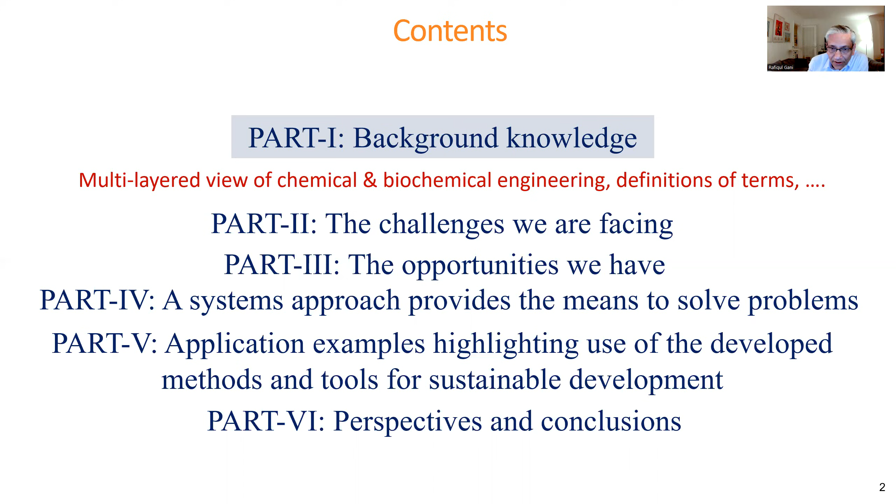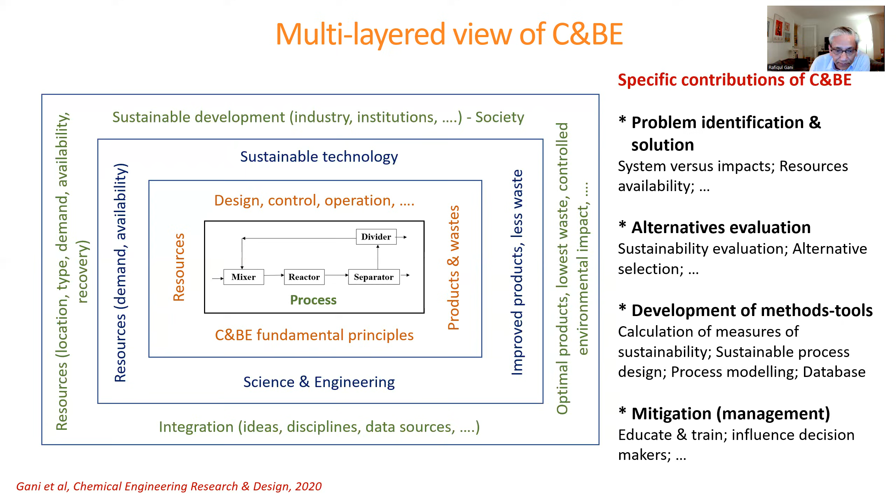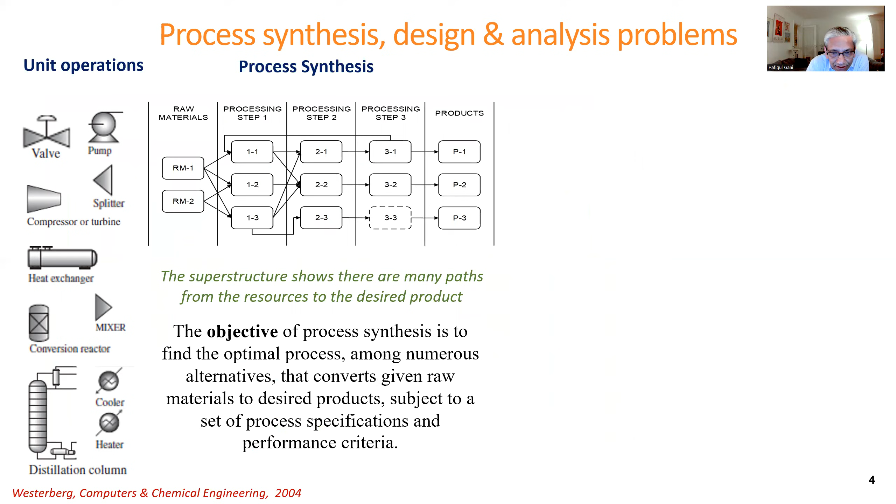Now let's define the synthesis, design, analysis problems. On the left-hand side, you can see a list of unit operations. The objective of process synthesis is to find the sequence of these operations that give us the product that we want from the raw materials that we can use. And what you see is a superstructure of different alternatives, and we want to find the best one. Once we have found the flow sheet, then we need to design the flow sheet in terms of adding more details to the operation, like in a separation column, the number of stages, in a reactor, the temperature, pressure to give the conversion, and so on.

At the same time, once we have the design and the synthesis of the process, we also need to analyze to find out if there are any errors, if there are opportunities for improvement. And based on these, we can set new design targets. And if we can find alternatives that match these design targets, we would have an improved process. So very briefly, these are the synthesis, design, analysis problems.

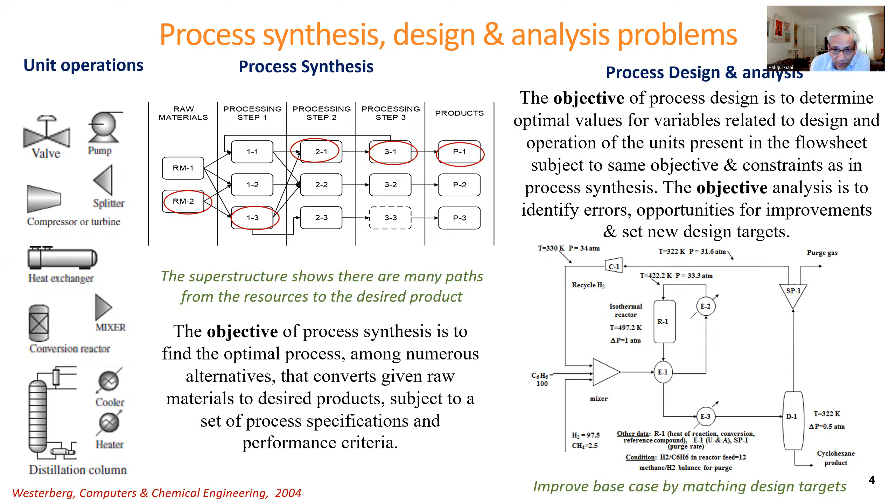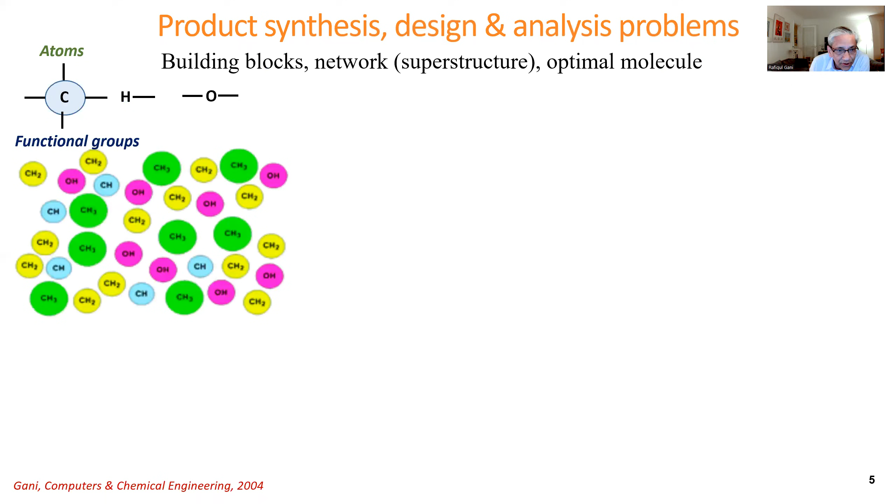The product synthesis, design, analysis problems are also similar. Instead of unit operations, if we think of atoms and bonds and groups of atoms, we combine them to form molecules. Here are examples of molecules, and then we need the properties of these molecules to understand the behavior of the molecule or the product.

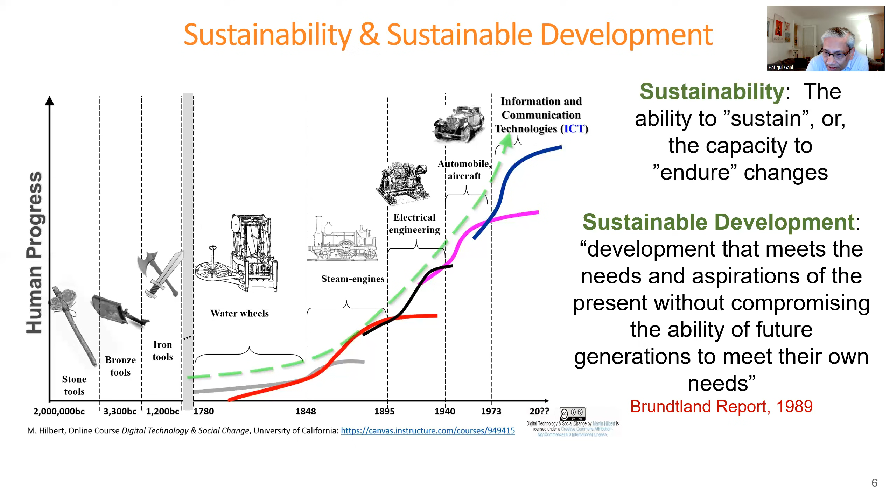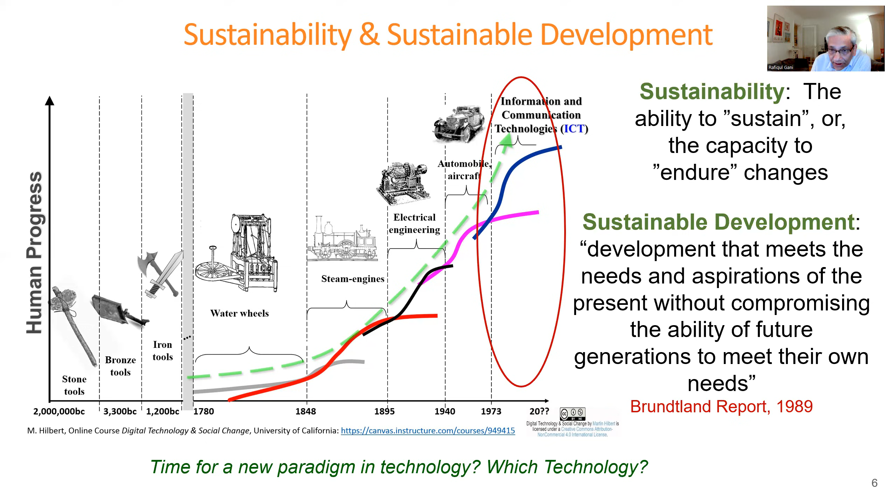What is sustainable development? Again, I like this definition, which says the development that meets the needs and aspirations of the present without compromising the ability of future generations to meet their own needs. The question also is: is it time now for a new change in technology? Or which technology do we need in order to make a new jump and avoid the curve breaking downwards?

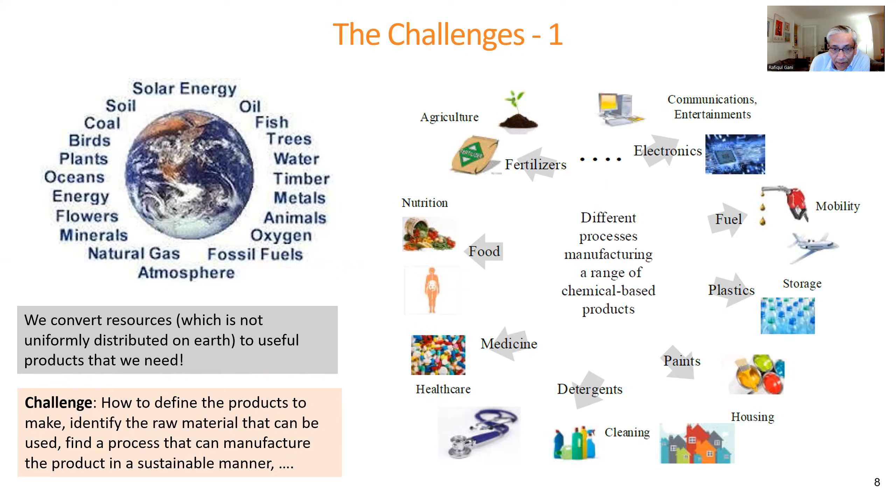So the challenge: how to define the products to make, identify the raw materials that can be used, and find the processes that can manufacture the product in a sustainable manner. Another challenge is that whatever decisions we make on which product to make, which resources to use, which processes to select for conversion of products, etc., have consequences. And these consequences can be represented by the energy, environment, water, food, health nexus, or challenge.

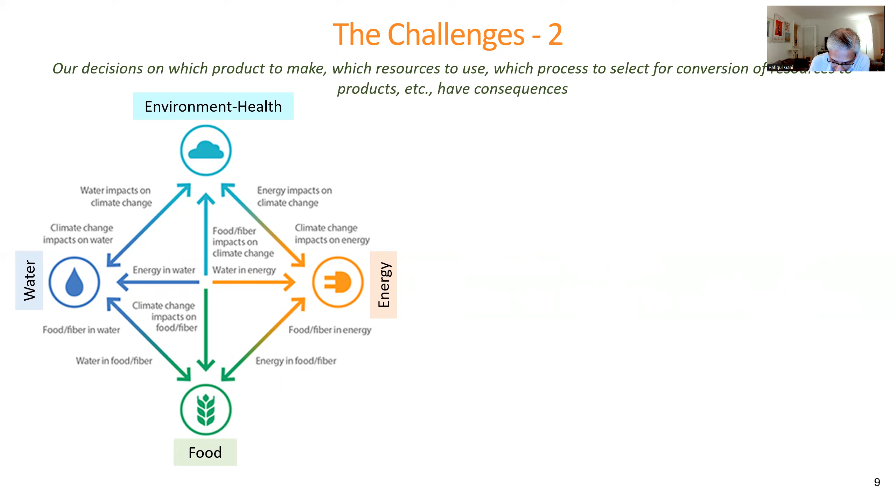They are integrated, and this is even a bigger problem, thinking of a growing population on Earth, which requires an increase in the global GDP, increase in the production capacity of most commodities, which will require more energy, more electricity, more water, and which will increase the release of greenhouse gases. So the challenge: how to address the interactions of energy, water, food, health, etc., for a growing population.

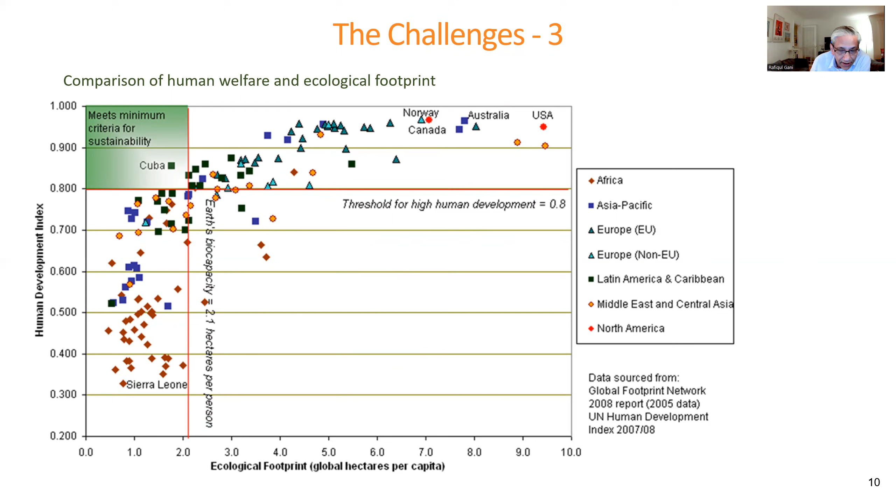The third challenge is a little bit more complex. On the plot, you see the human development on the y-axis and the ecological footprint on the x-axis. The vertical red line indicates the Earth's biocapacity equal to 2.1 that was reported in 2008 from data from 2005. And this is related to the following numbers.

For every country or region, the ecological footprint can be calculated and the biocapacity can be calculated. Those that are green have the footprint smaller than the biocapacity. That means their activities are less than the capacity for that region to endure. For the others, it is the opposite. And now, 10 years later, in 2018, the average was calculated to be 1.73. You see that in the vertical dashed line. So in 10 years, we moved from 2.1 to 1.73.

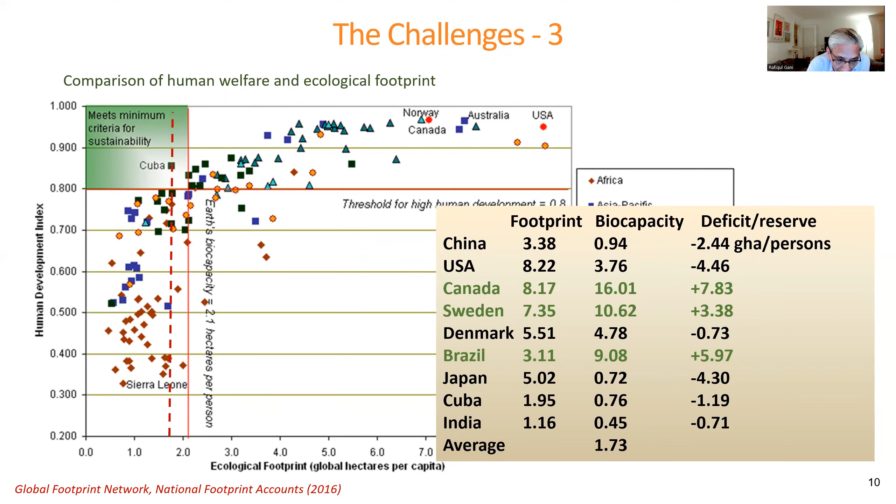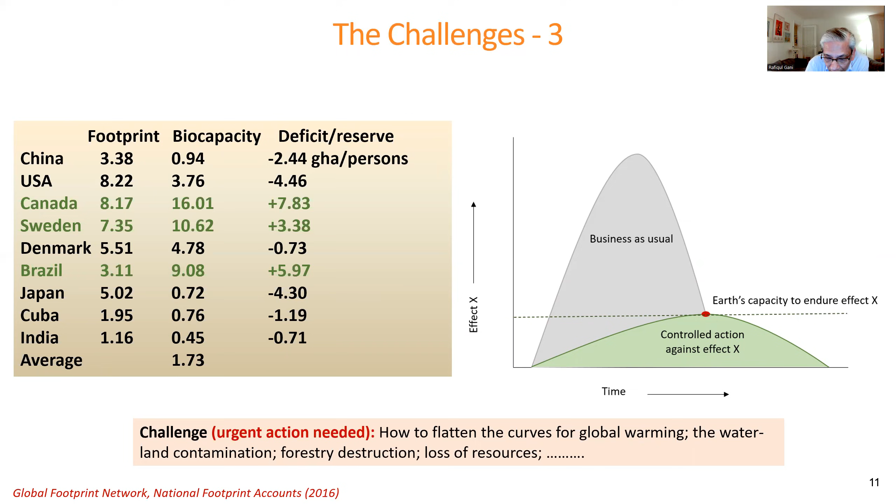Who knows what will happen if we go to 0? So the third challenge is how to avoid going to 0 by flattening the curve, which is in gray, to reach the curve which is green. This kind of analogy is very common now with respect to the COVID-19 pandemic. We need to flatten the curve to reduce the effect of COVID-19. It's the same. We need to flatten the curve for global warming, for water, land contamination, forest destruction, loss of resources, and so on. That's the third challenge.

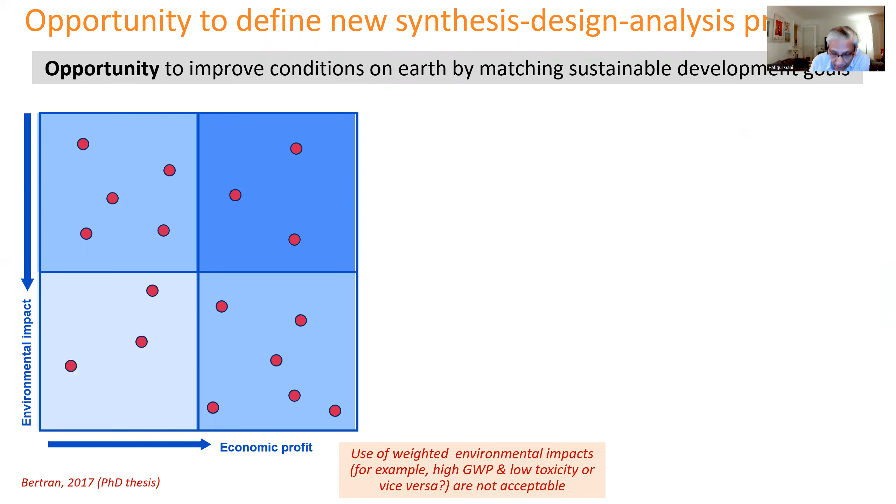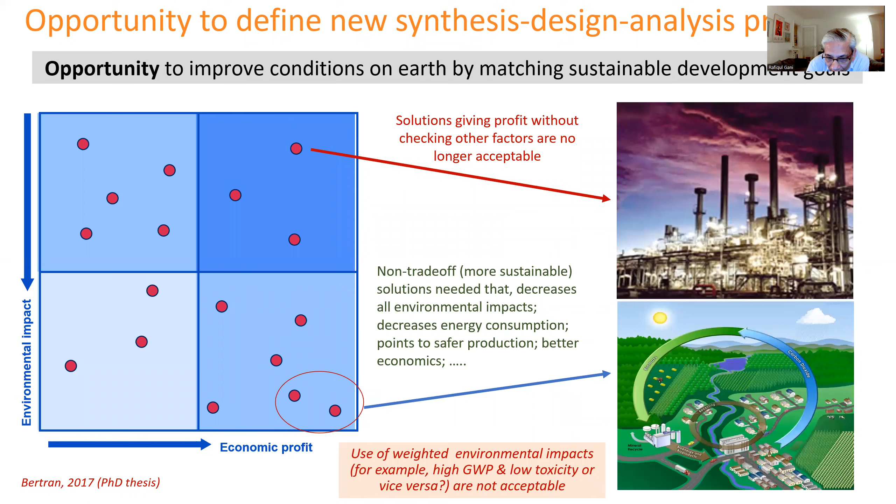The plot on the left-hand side shows the environmental impact on the y-axis and the economic profit on the x-axis. We certainly do not want this kind of situation, which will give us more profit and bigger environmental impact. What we want is this, where we get economic profit, but very low environmental impact. But this requires a new definition of the problem. We want non-trade-off solutions that decrease all environmental impacts, not just a weighted sum, separately all of them, decrease the energy consumption, point to safer production, better economics, and all of these.

Also a question: are we actually targeting to achieve these goals in our different projects? Many of the published papers I see on sustainability do not actually refer to any of the goals that they have satisfied. So it's something to worry about.

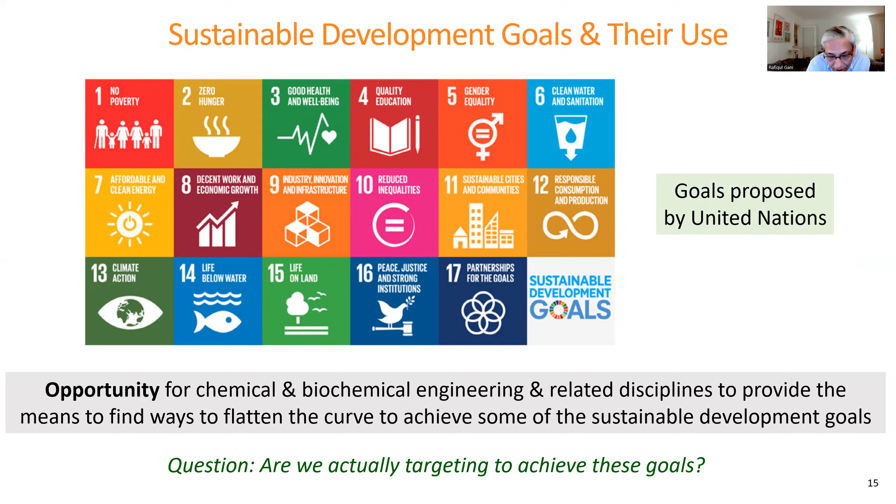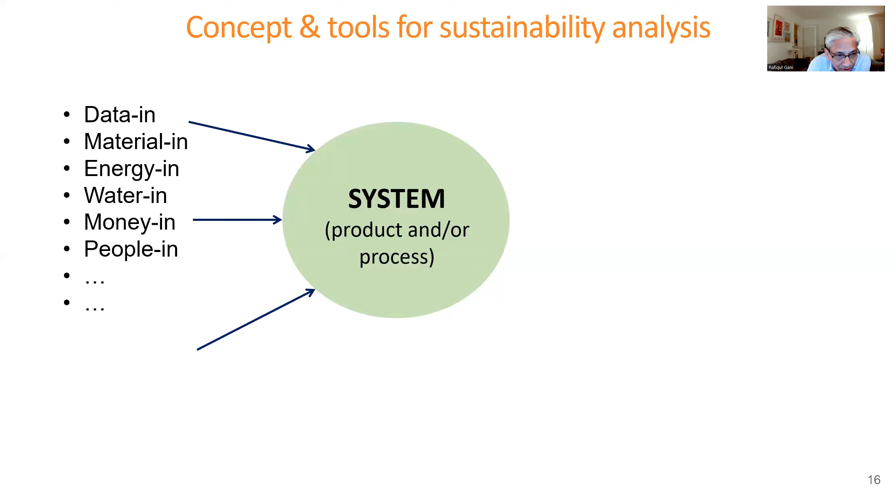How do we measure the sustainability? We need to do the sustainability analysis. Here is a simple concept and the associated tools. We define the system in terms of our product, process, or both of them. Whatever comes into the system in the form of data, material, resources, money, people, whatever comes in, whatever goes out in terms of final results, as well as waste that is released and affecting the environment, and the waste that is recovered and reused.

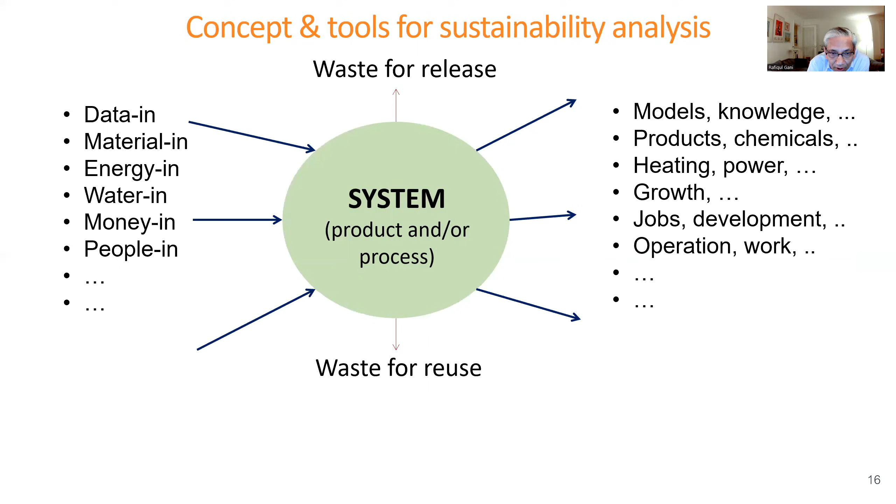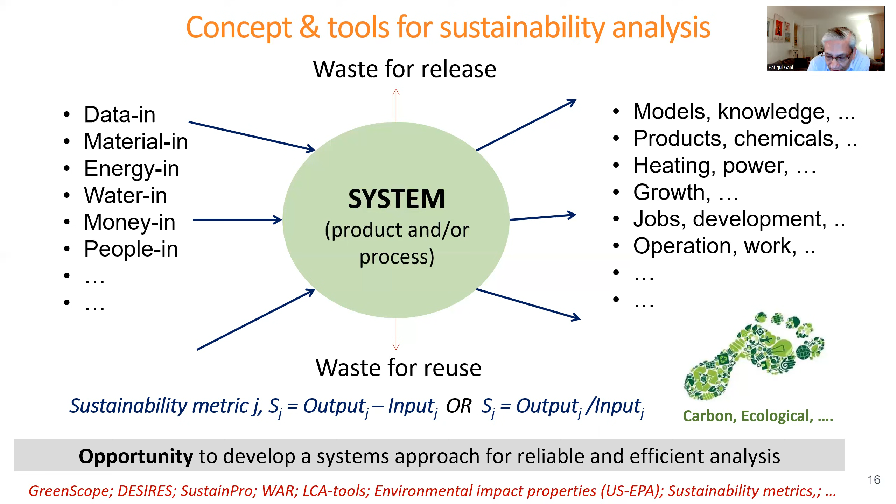If we have all this information, there can be many ways to collect them, but whichever way we collect them, if they are consistent and correct, we can then calculate the sustainability metrics, which are usually related to output and input, either the difference or the ratio. And the same information can also be used for models to calculate the carbon footprint, ecological footprint, and hydrogen footprint, and so on. There are tools that are already available, but the opportunity is to develop a systems approach for reliable and efficient calculation of these measures.

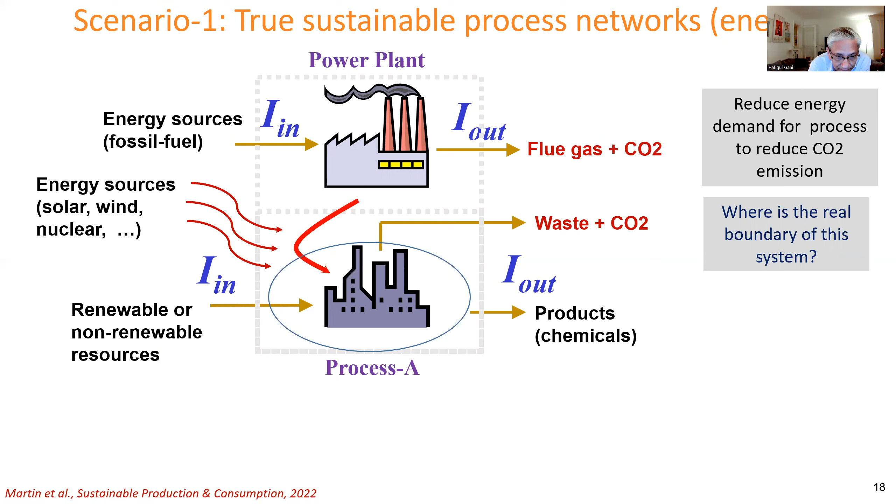But the process also needs, for example, energy, and that is provided by, for example, a power plant that converts energy resources, and depending on which resources they use, they will also generate CO2. So the process, as well as the power plant supplying the energy for the process, together will generate waste and CO2. There can be other ways to get the power from other energy sources that will not release CO2. So there are energy demanding technologies like process A and energy producing technologies like the power plants. And they use different resources, some that generate CO2, others that do not.

We need to combine those two in such a way that we will have zero or negative CO2. So the opportunity to combine these technologies to determine new innovative solutions that are significantly better is possible.

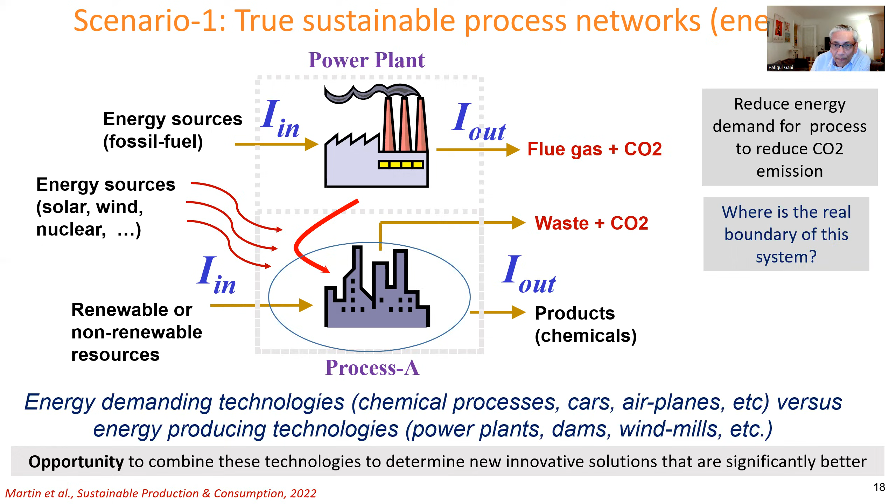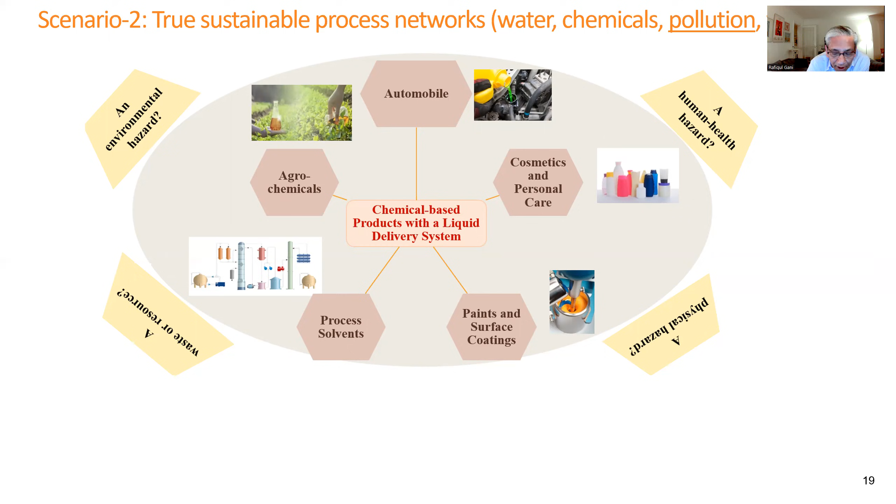Scenario 2 deals mainly with pollution, where energy is not the important issue, but pollution in different forms and waste in different forms are important. And if we consider that nearly 95% of all manufactured goods rely on some form of industrial chemical processes, out of which nearly 500,000 chemical substances have been registered, and an estimated 40 to 60,000 industrial chemicals are found in commerce globally. And take into account that the measured data can be found for around 20,000 chemicals only.

So what about the other remaining chemicals that we are using? What effect do they have? So the opportunity is to develop a system for prevention instead of curing the problem.

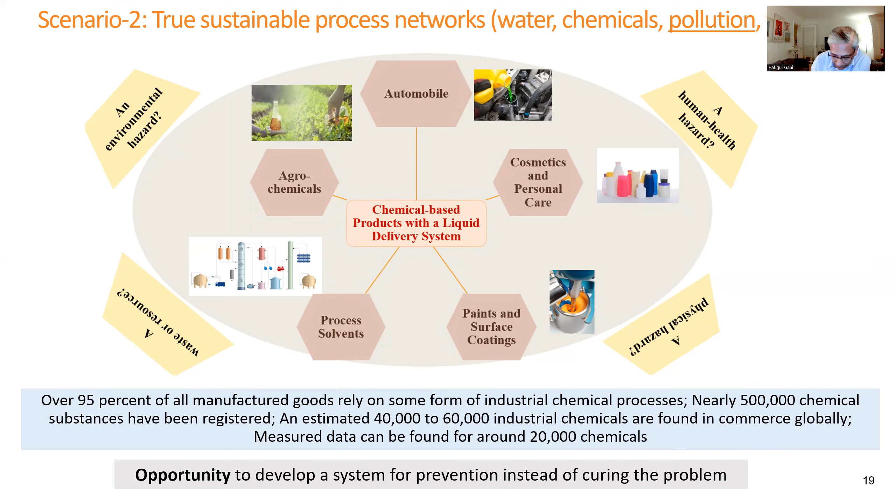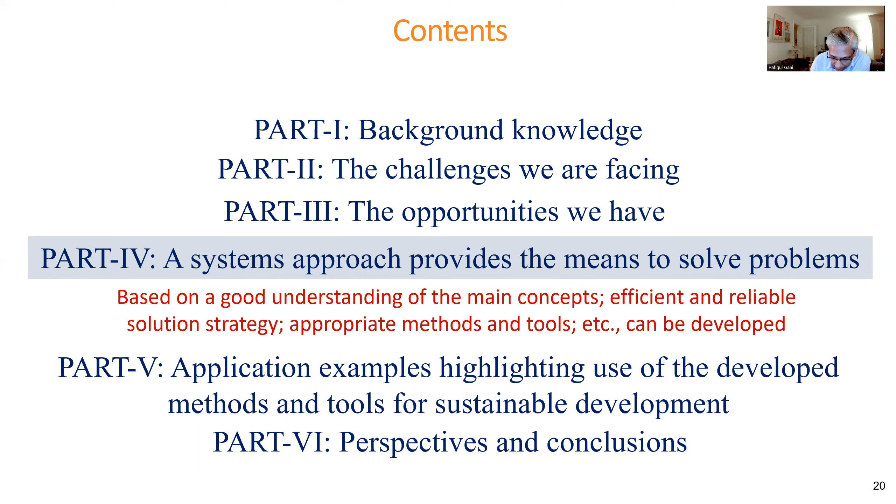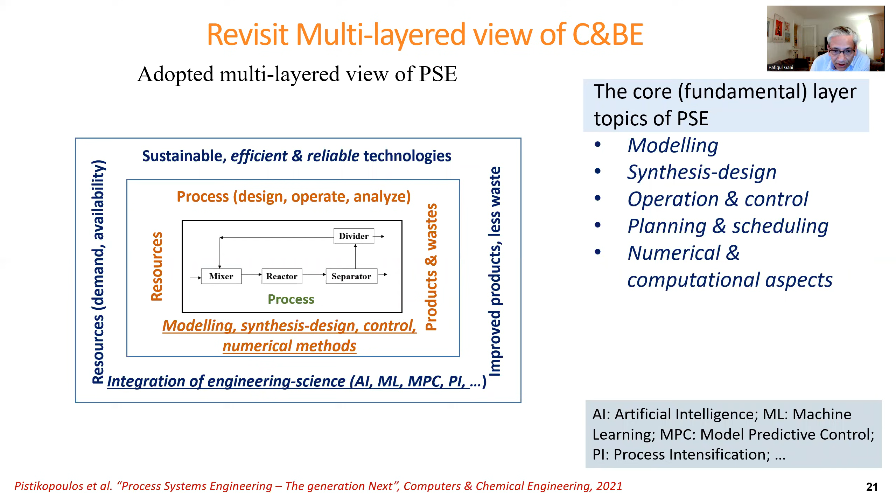Now the core topics are modeling, synthesis design, operation control, planning and scheduling, numerical and computational aspects. These are the fundamental topics of process systems engineering that can help us to design, operate, analyze chemical and biochemical processes, in addition to the fundamental chemical and biochemical engineering topics of thermodynamics, reaction engineering, etc. And again, we need to augment the fundamental topics with the topics from the middle and outer layers so that we can achieve the final goals. So develop methods to combine the core topics with those of middle and outer layers to meet the current and future challenges.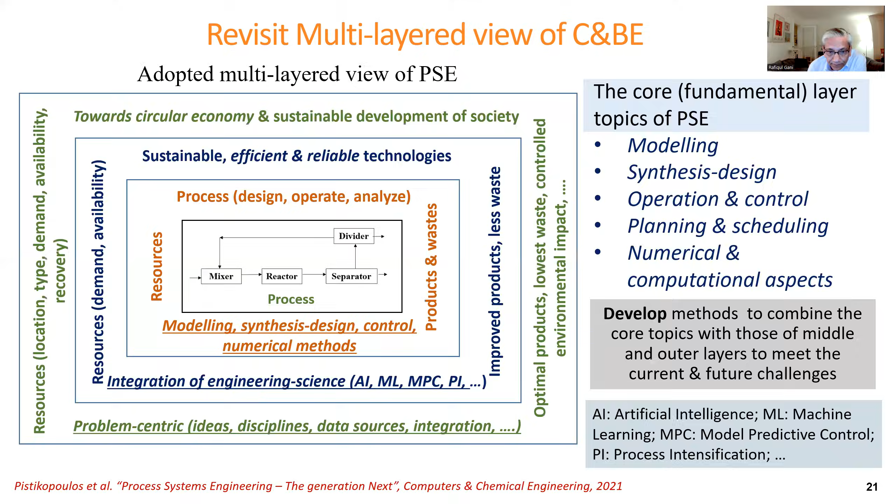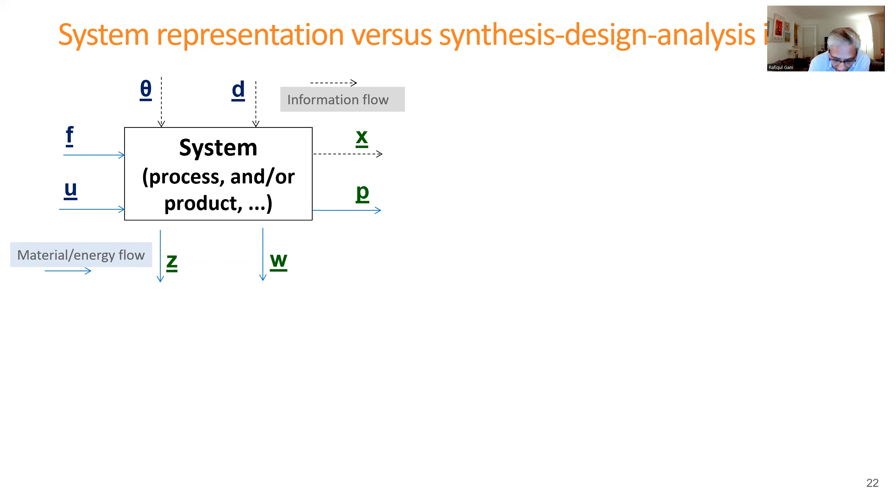And this can be done at different scales by combining the models at different scales, starting from the lowest microscopic scale or phenomena to the largest mega scale, like enterprise. All of these can be handled through combination of different systems and models. And what kind of questions do we want to answer? Which material to use and how much to use, which product to make and how much to make. So there are decision variables as well as real variables. Which utilities, how many processing steps, and so on. So all of these questions we want to answer, and if we answer them correctly, we will end up with a sustainable process design.

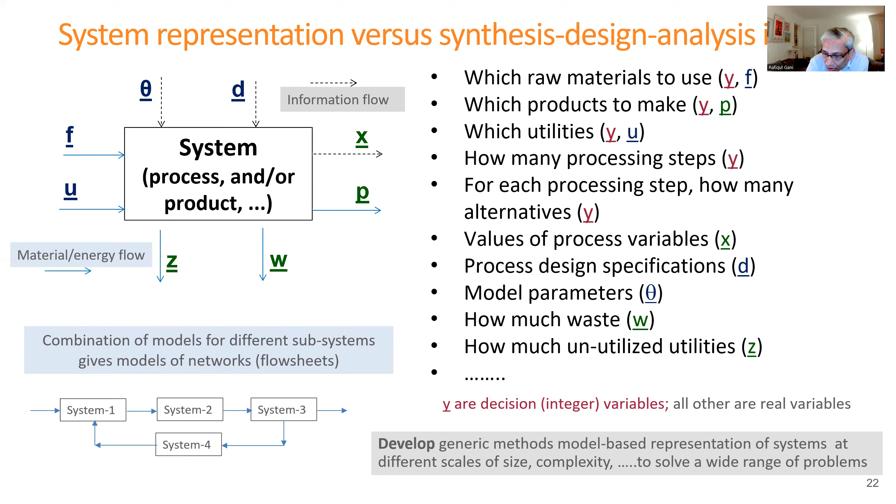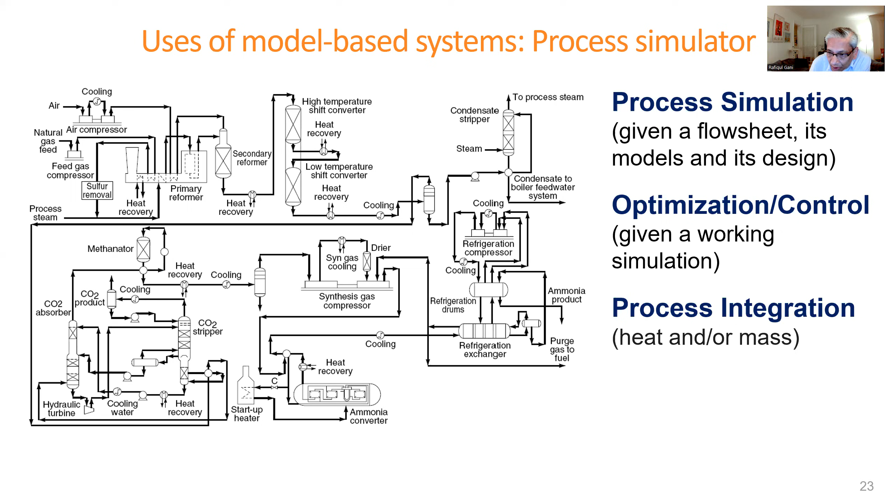Ammonia is a very important product now because in addition to fertilizer manufacturing, it also can be used as hydrogen storage for the hydrogen economy. So if we have the model through a process simulator, we can do process simulation, optimization, control, process integration, analysis, and these problems are routinely solved, provided the needed information is available. You can think that at any time on Earth, somebody somewhere is using a process simulator to solve this problem. So it's very common.

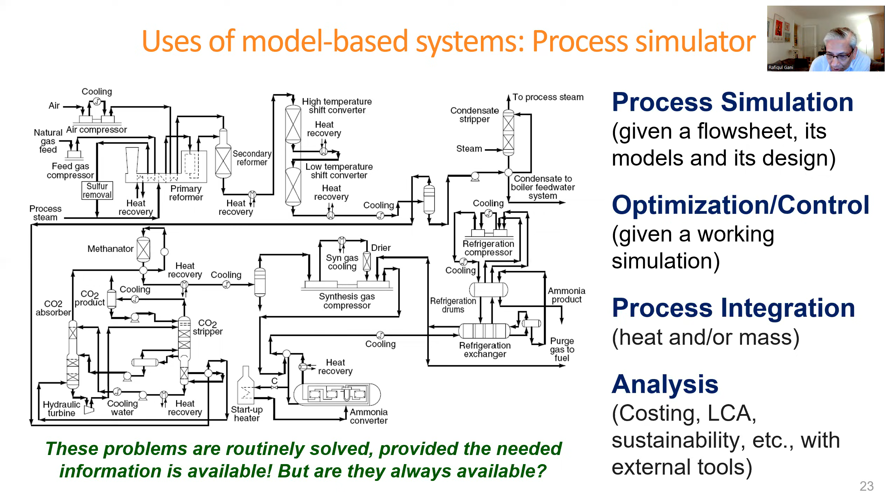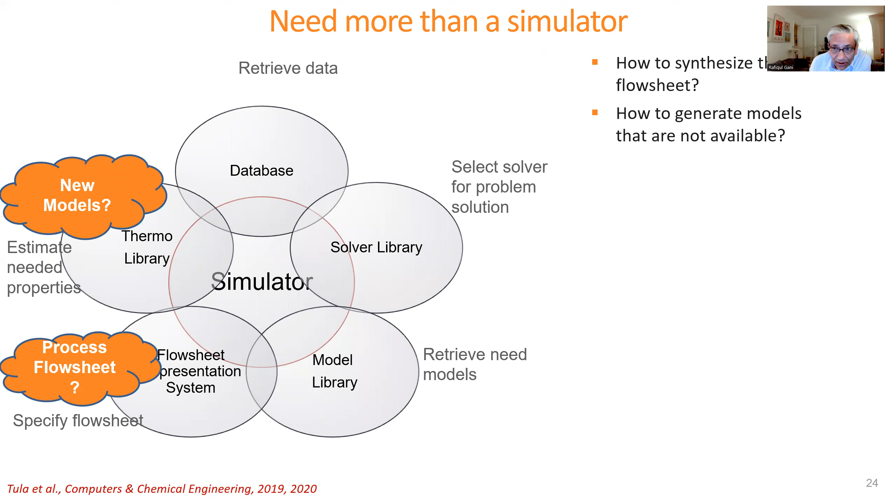But the question is, is all the information that is needed always available? Let us look at a process simulator and the main parts of a process simulator. These are all available. But what happens if a process simulation flowsheet is not available? Or what happens if some model that we need is not available? Or there's a new unit operation? Or we need new solvents or catalysts or new compounds? Can the simulator work? Obviously, the simulator does not do these things. So we need a new class of simulators or software components.

But we are still solving these problems. How do we solve them? Basically, we are doing a trial and error approach. We guess these things. Then we do the simulation. If they match our requirements, it's fine. If they don't match, we do it again. The trial and error approach can give us the solution we need. We can be lucky if we get it faster. But do we really get the order of magnitude improvement and new and novel solutions? In my view, no. So we need to develop a new class of component-based software tools associated with problem-specific workflows and data flows that can tackle a wide range of problems of interest.

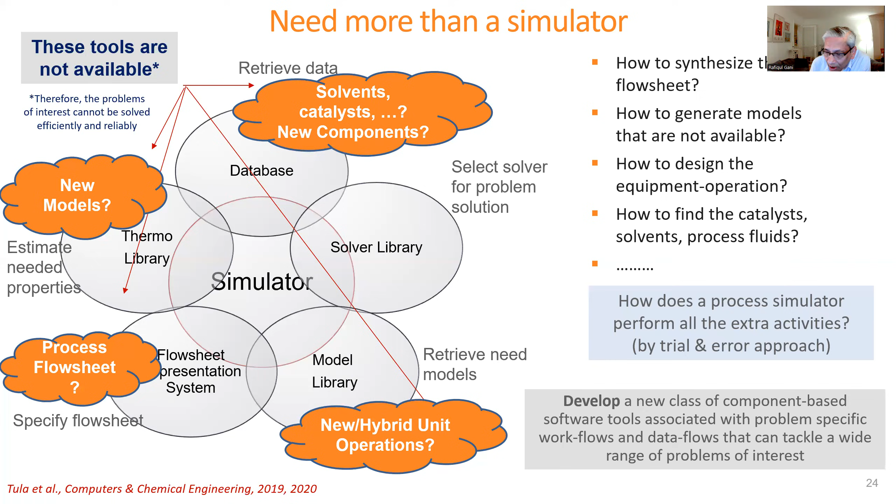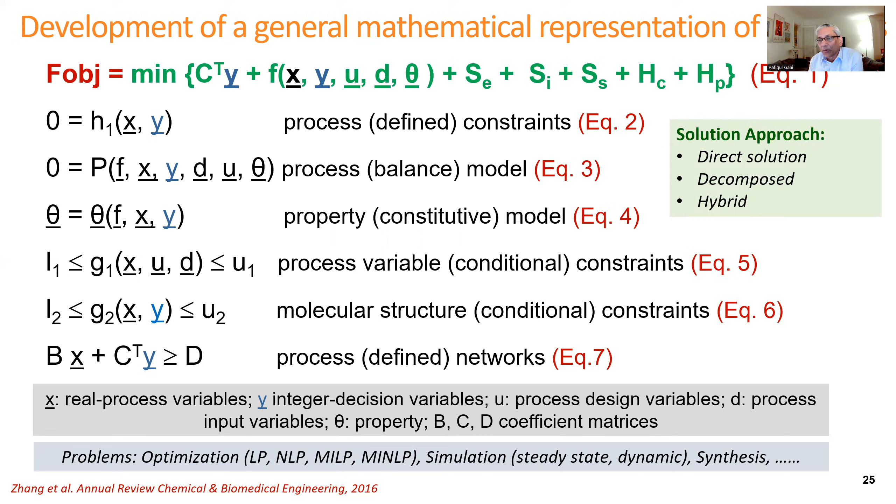Depending on the equations, we can solve all the equations simultaneously. That would be the direct solution. We can solve them in a decomposed manner. That would be the decomposition-based solution, or we can do a hybrid, a combination of both. Which one to use depends on how many equations we have and what the complexity is. It can be as simple as 7 linear equations, or as complex as 1 million highly nonlinear equations. So the model and the problem will define the solution strategy.

Here are some examples. Equations 4 and 6 typically represent a product design problem. Equations 2, 3, 5, 7, a process design problem. Equation 1 is the objective function if we want an optimal product or process. And any equations from process going to product or product going to process means an integrated product-process design problem. If we solve only equation 3 or equations 1 to 3, we need a process simulator that also does optimization. But if we want to solve equations 4, 6 or 1, 4, 6, we need something similar to a process simulator that we can call the product simulator.

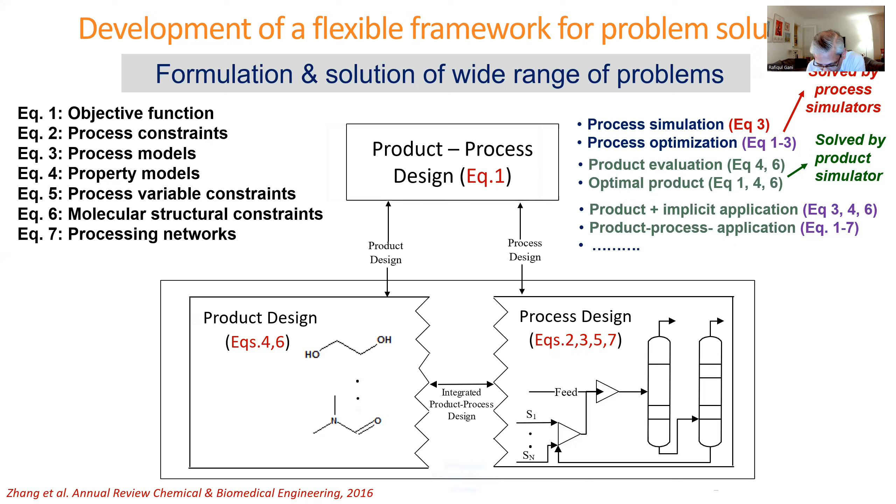Or we can solve integrated product-process problems, the simpler one, 3, 4, 6, or the most complex one, from 1 to 7, and many more. So these are the types of problems we want to solve, the corresponding solution options that we need to have, and the solvers we need for them. So let's look at the decomposition-based solution strategy.

We have 3 stages. We decompose the problem into 3 stages: the synthesis stage, the design stage, and the innovation stage. And this can be done through the 12 steps that are given in the workflow for sustainable process design. And in order to achieve this workflow, the different tools we need, the algorithms we need, the data we need are shown on the right.

I'm not going to go through all of these now, but I will just point out one of the tools, which is this one. The other tool, ProCAFD, is called computer-aided flowsheet design, which does all those other things. And I can point out where the use of the simulator is, as we know, only with respect to simulation of the process, the rigorous simulation of the process on the top right-hand corner. Other than that, we need a lot of other tools that, unfortunately, the process simulator does not provide.

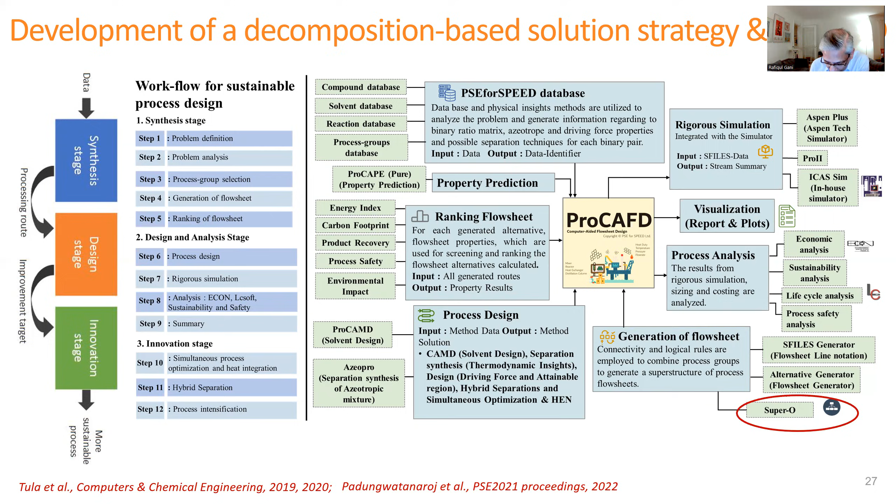So what is Super-O? Super-O is a synthesis tool that can do process synthesis as well as innovation, and it can be applied for both. So we define the problem in terms of what we want to convert and what we want to achieve. Based on that, we create a superstructure. Super-O helps to generate the superstructure. Once the superstructure is generated, Super-O converts this through the generalized model and represents the entire superstructure with the model.

Then we do a model analysis to find out which variables and parameters need to be specified in order to solve the problem. We have a database that can help us to provide the variables for the known variables and parameters. Otherwise, we need to collect them and regress them. And once the model is ready to be solved, then we connect it to external solvers, and Super-O does this connection automatically, and it calls the numerical solver and then gives the solution.

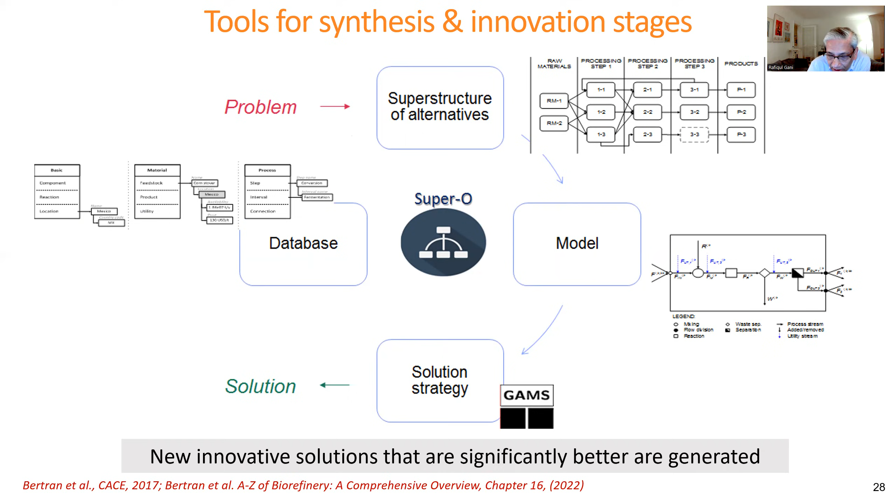And then once the solution is obtained, we have a process flow sheet, which we can then connect to a simulator and do the simulation and optimization for the specific result that we have found. This gives us options for new innovative solutions that are significantly better and that can be generated. The final aspect of the tools and systematic method is representation of the result for comparison purposes.

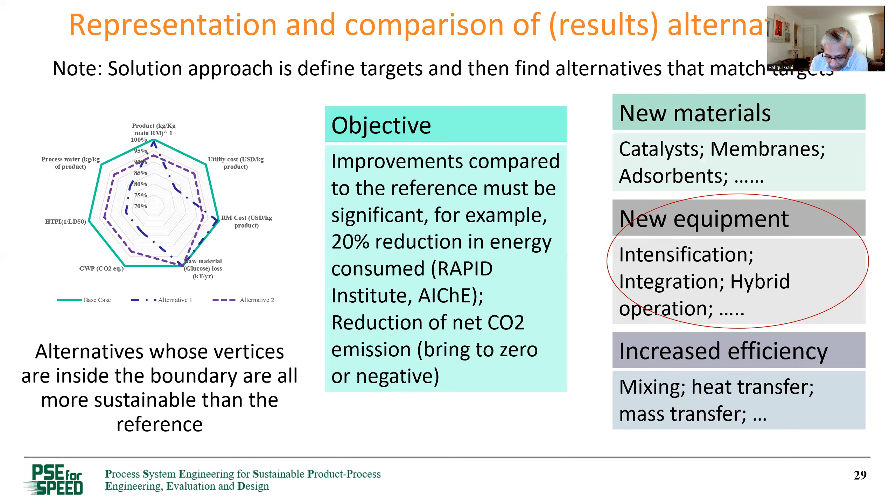Sustainability, in my view, is not an absolute measure, it's a relative measure. So what we need is curves like the spider curve or the radar plot. We have the green, which is the boundary, and what we want are solutions that are inside the boundary, and at least 2 of the vertices should be better than the boundary, and none of the vertices should go outside the boundary. If we achieve this, then we achieve the objective of generation of sustainable alternatives, and we can find them through new materials, through new equipment, through increased efficiency. With this background, let us look at some of the examples.

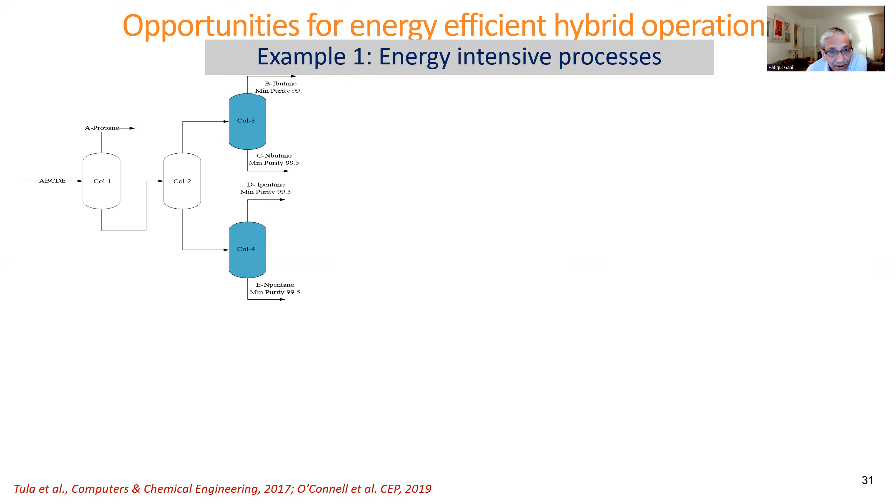The first one I will show is what we can do to reduce the energy demand. But energy demand is not enough. We also need to see, are those processes energy intensive? That means how much energy do they use? And compared to biochemical processes, petrochemical processes use more energy, and also the volume of the chemicals handled is much higher. This specific example is a depropanizer, debutanizer, and the 2 shaded columns use a lot of energy. And they use distillation columns. So can we reduce the energy by replacing the distillation column, which is energy intensive?

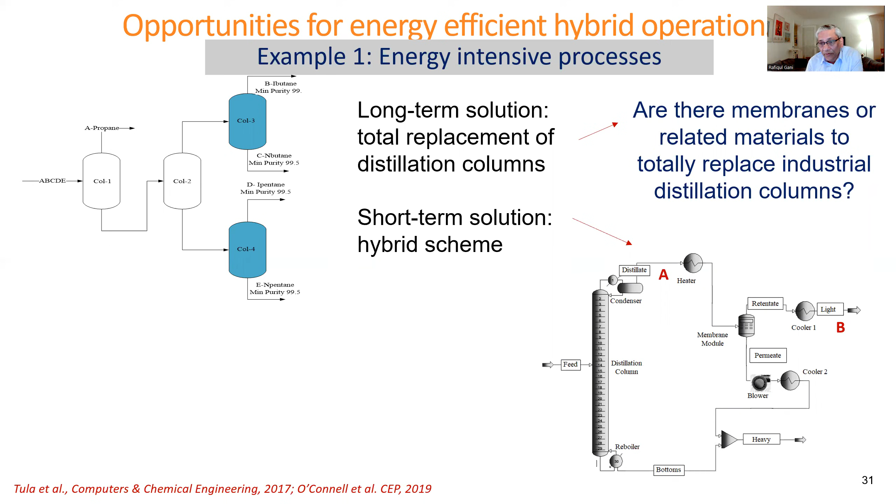So we still reach the 99% requirement of purity, but we combine 2 unit operations that operate at their highest efficiency. Between 10 to 50% of the energy consumed by the single distillation column can be saved. Considering that at least 100,000 distillation columns are operating currently on Earth, there's an opportunity to make a big impact.

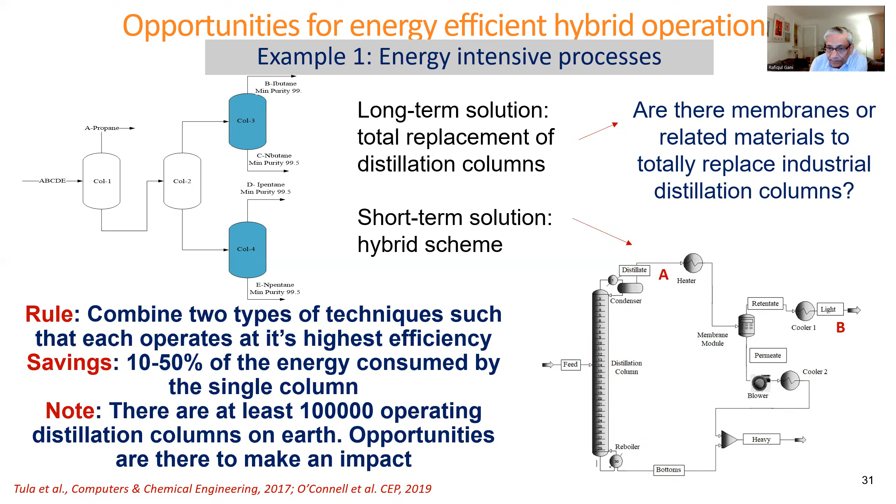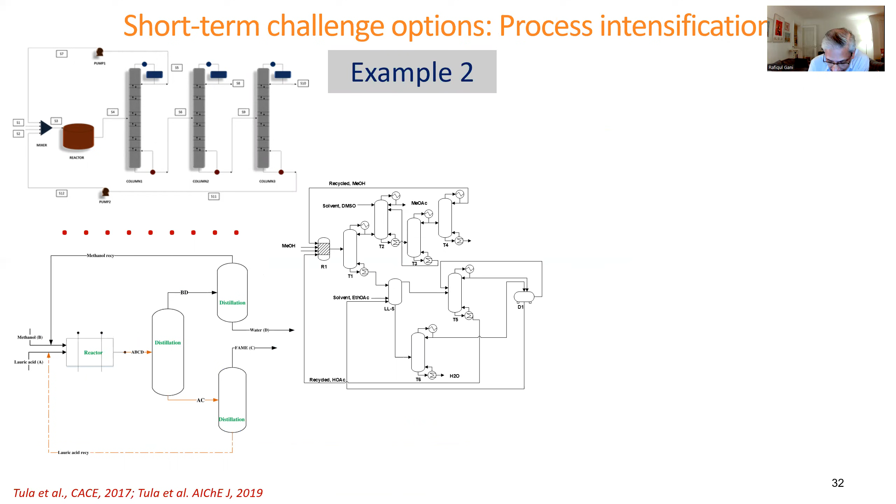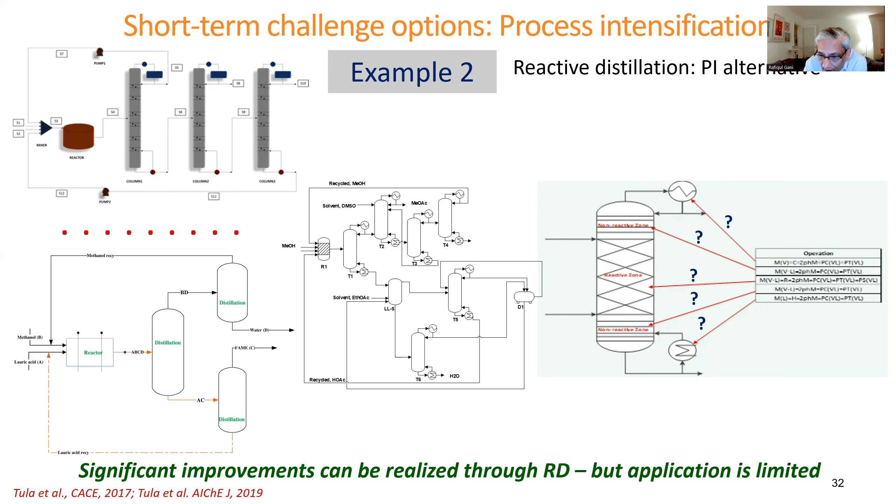Another one is that we have these 3 processes. All of them use a reactor followed by separation. The bottom left-hand corner is a biochemical process. So whether it's a biochemical or chemical process, if the flow sheet is like this, reactor followed by separation, they can be converted into one intensified reactive distillation. The questions relate to the condenser and reboiler duty, as well as the number of stages in the reactive and non-reactive sections. But how do we know that for a chemical or biochemical process, a reactive distillation can be used and the required improvements can be achieved?

If the answers that you see to the questions on the column below the reactive distillation are all yes, then definitely a process can be converted into a reactive distillation. If, for the separation part of a process, the 7 questions are yes, then at least 2 columns can be converted into a divided wall column for the same benefit, at least 20% improvement.

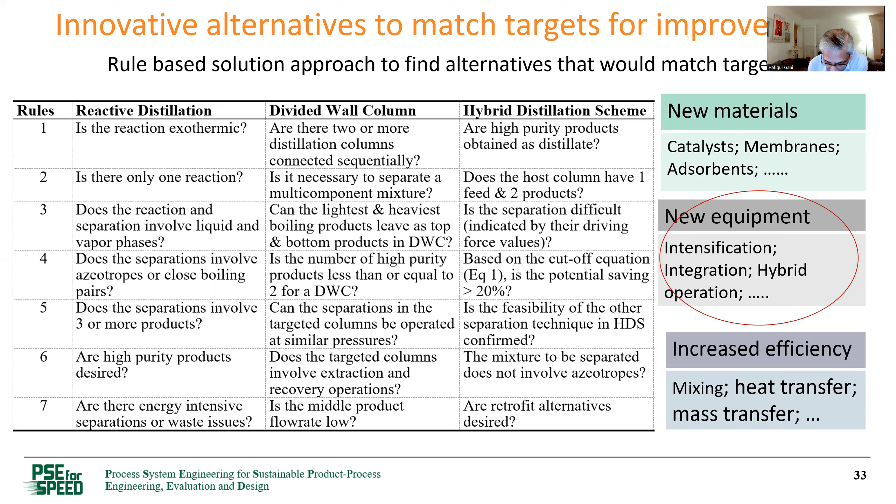If a distillation column is operating and the answers are yes to the 7 questions, a hybrid distillation can be found with between 10 to 50% improvement, usually 20% improvement. So all of these are possible. And methods and tools are already available.

Let's look at the synthesis design problem for a biochemical process, and it's multi-product, so it's not a single product biorefinery, but a multi-product biorefinery. We have 3 raw materials: palm seeds, waste cooking oil, microalgae. We have biodiesel, which is P1, glycerol, which is P2, and other products which are P3, P4, P5. So how much product to make, which raw material to use, we want to find out by synthesizing the process and designing the process.

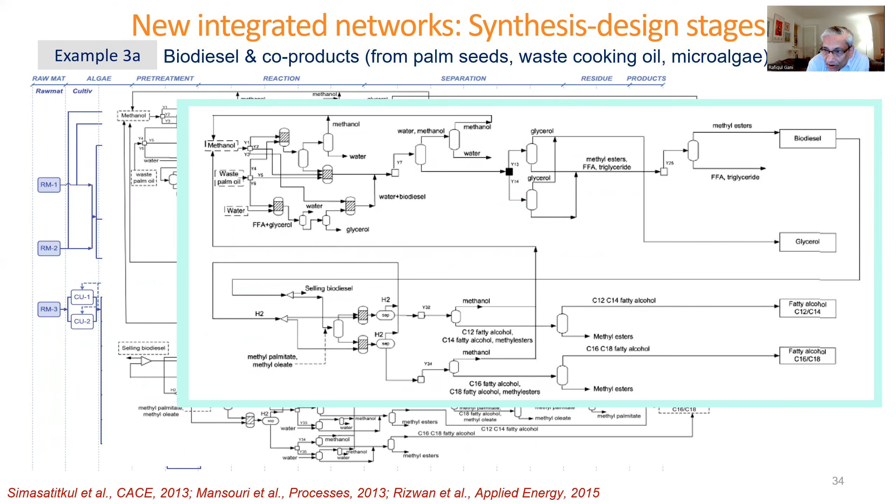So by solving this synthesis problem as a mixed integer nonlinear programming, we find out the detailed flow sheet of the process. And in order not to spend time on this, I simplified the description. So we have the biodiesel, we have glycerol, but we are not taking the biodiesel out from here. We take it out from the green boxes that you see, because we take out part of the biodiesel and part of it we convert to fatty alcohols, which have a higher price than biodiesel.

So when the price of biodiesel is low, we can convert the biodiesel to higher value products. When it is high, or when the demand is high, we do not need to do that. At the same time, we have glycerol, whose demand is not very high, and we need to convert it to something else. And that I will show in another example where we can take this glycerol and do something else with it.

So let's also look at the synthesis problem, because we already talked about how the Earth's resources are not uniformly distributed. So problems like this are also region dependent. So first, we formulate the problem as a simple synthesis problem with 1 product and multiple raw materials, 6 biomass raw materials coming from 7 different countries. And we want to find out which raw material to use from which country to make ethanol with the best profit.

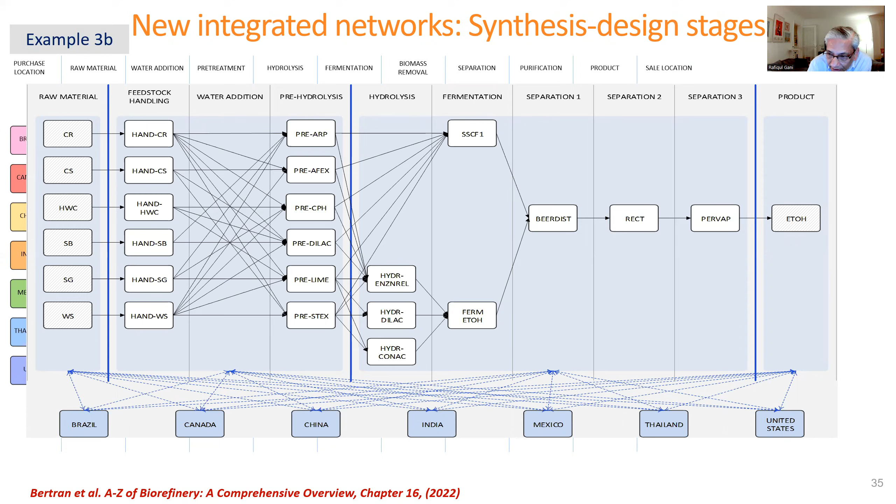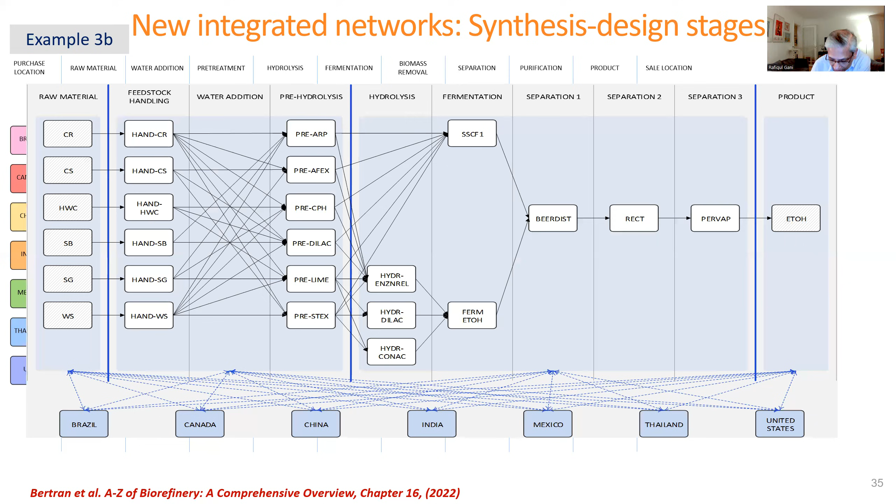But we also increase the superstructure information by dividing the superstructure into 4 parts: the raw material part, the product part, the pretreatment part, and the process part. And each of these parts can be done in each of the 7 countries. But without taking this information about the different locations and countries into account, if we just consider which raw materials from which country can be used to make the product at the highest profit, it comes out that the best is to use cassava rhizome to make ethanol in Thailand.

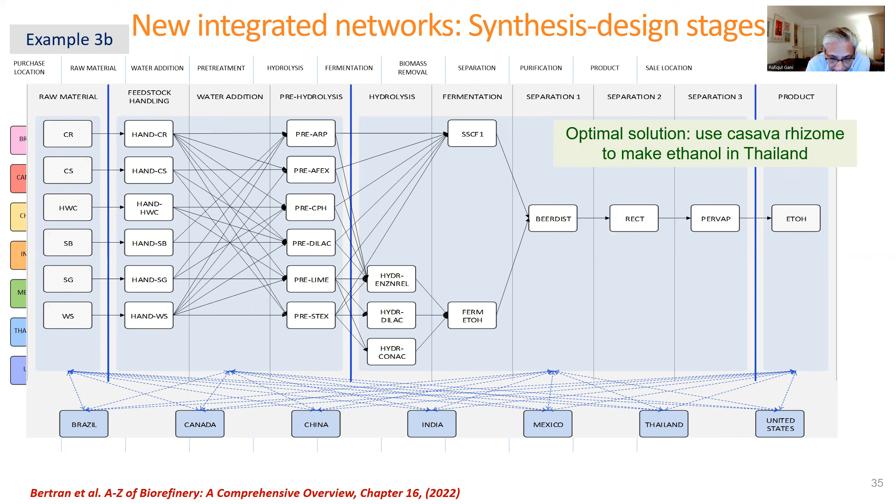However, if we take into account that different locations have different demands, different prices, different raw materials, all of these things, then the solution is totally different. The solution says ship the raw material to Canada, do the pretreatment in Canada, then do the processing of the pretreatment results in Mexico, and sell the product in the USA because the demand and price are highest in the USA.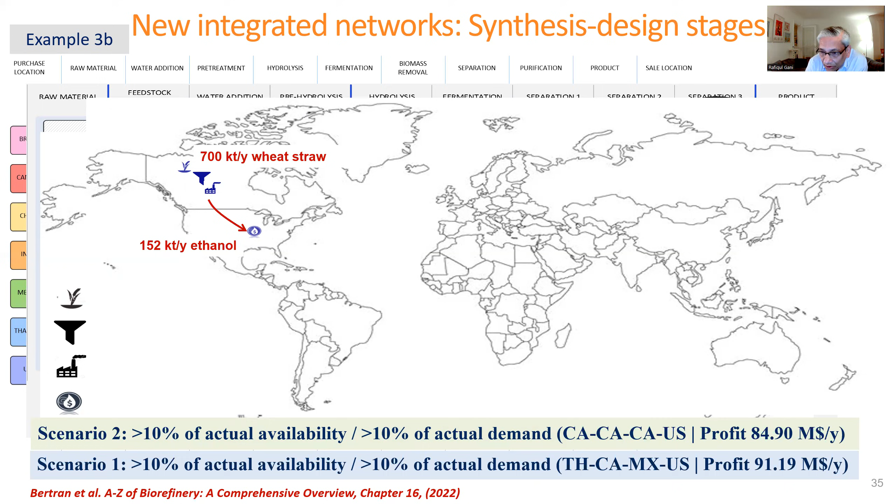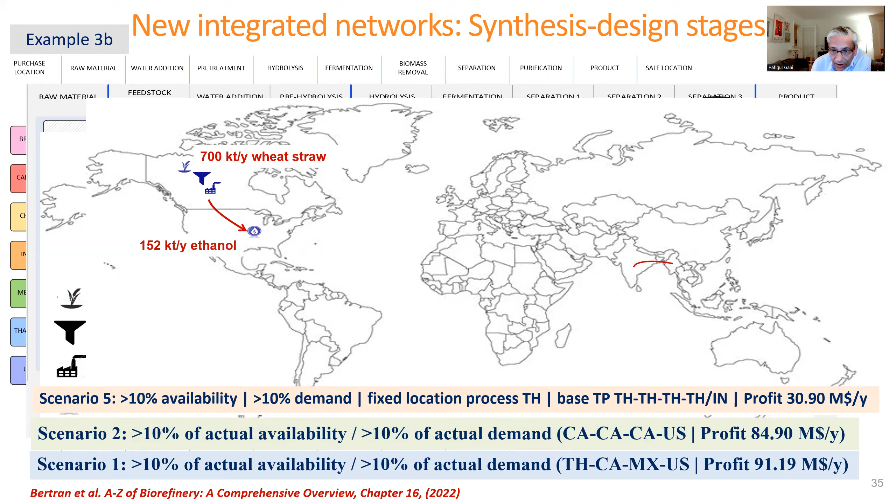What if we still want to use cassava rhizome and production in Thailand? Then it says, yes, you can do that and sell the product in India because the demand is higher in India, production is higher, the transportation cost is included, but the profit is much lower. So different scenarios can be formulated, and for different locations, different solutions can be found. And this is also interesting because it is not just a question of finding a solution, but also finding the solution corresponding to the location where it would be applied.

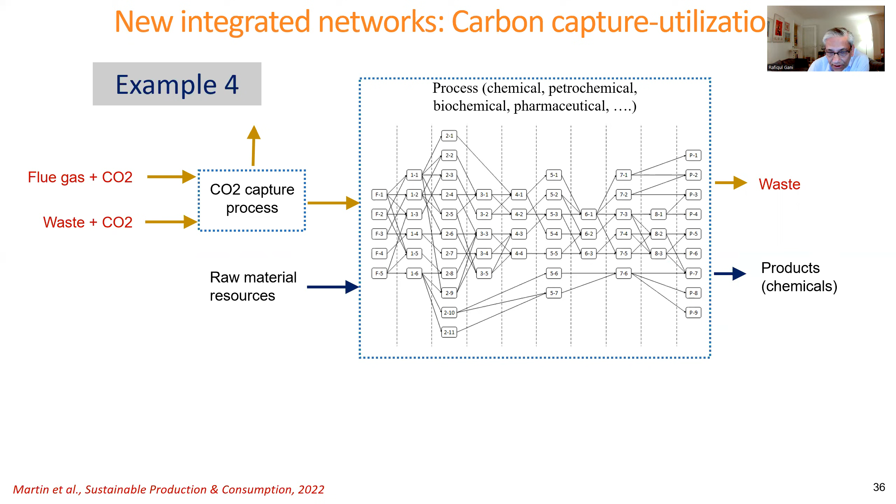The last two examples are related to capturing CO2 and making sure that the overall process makes a profit as well as reduces the CO2 emission, as well as other options. So we capture the CO2 and then we convert the CO2 together with the raw material into the product.

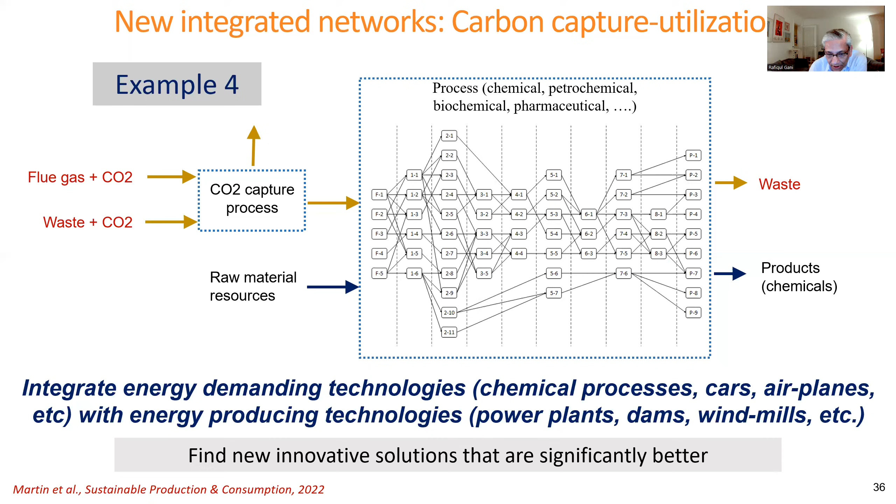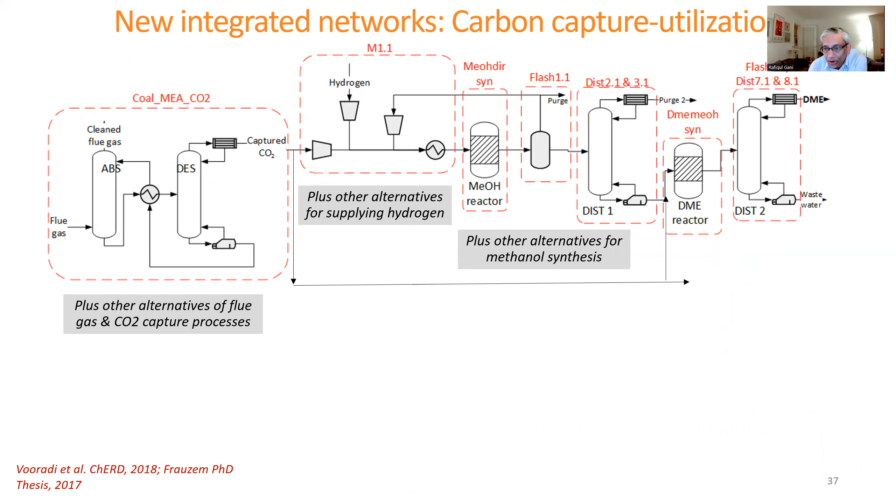So we are integrating energy demanding technologies with energy producing technologies to find new innovative solutions that are significantly better. I will show the first example with capturing the CO2, then converting the CO2, utilizing the CO2 to make different products. The figure shows DME. We can also make dimethyl ether. We can also make dimethyl carbonate, succinic acid, and so on.

If we compare the results, if you look at the bottom row, the global CO2 reduction is negative, very good. But if we look at the net CO2 in terms of ratio of tons of CO2 divided by the tons of product, these are very small numbers. It's very good that they are negative, but they're still quite small. Because they are very small, it means that the impact on global warming potential is very low.

And the reason for that is that there are more carbon atoms in the captured CO2 than the number of carbon atoms in the DME, DMC, succinic acid, etc., that are produced. So these low carbon molecules, and the demand is low, so it's not helping us, even though we have a very good solution.

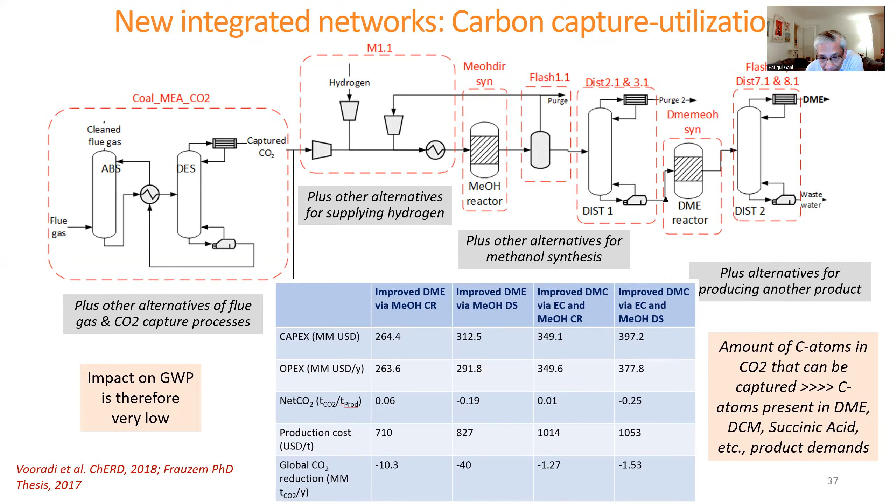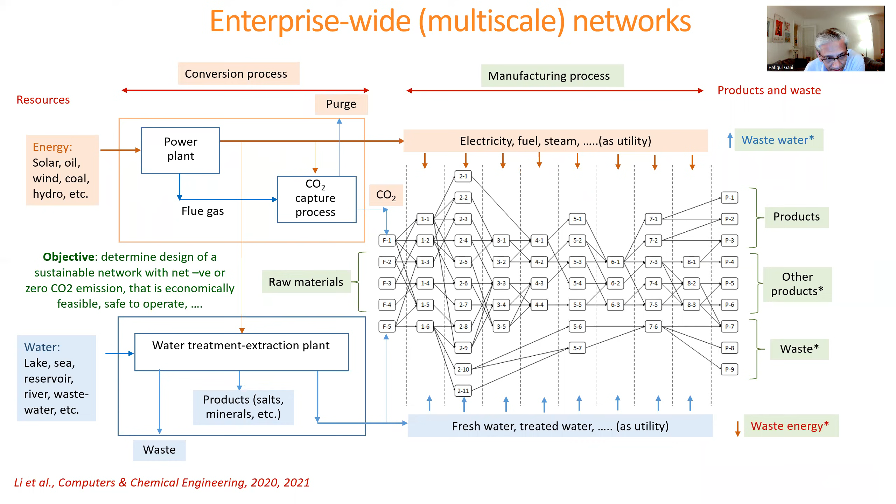So what can help us is if we do an enterprise-wide integration, that is an enterprise-wide network. We include the manufacturing process, but we also want to include the conversion process for energy, conversion process for water, capture all the CO2 that the conversion process will generate and use it so that the net CO2 will be negative or zero. So in that way, we can formulate the design of a sustainable network with net negative or zero CO2 emission that is economically feasible, safe to operate, and so on.

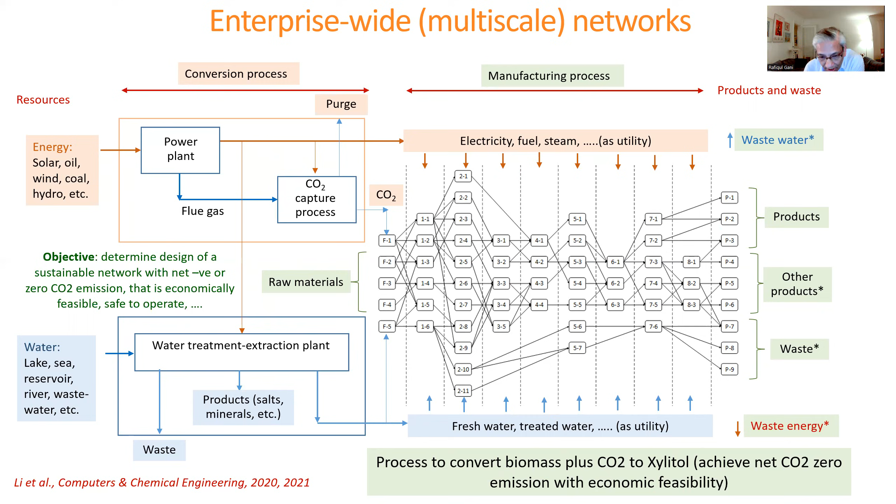Can this be done? In the reference papers, we have already pointed out that this can be done with biomass plus CO2 conversion to xylitol, and we can achieve economic feasibility, net zero CO2 emission, safe operation, and so on. I will not go through the details of that, but I will use my last example, where the synthesis problem is taking the glycerol or glucose from a bioethanol plant or biodiesel plant, or using maltose and sucrose, to convert them to succinic acid.

And in the literature, fermentation processes can be found for 10 different ways to convert these raw materials into succinic acid. And after fermentation are the separation steps. There are 5 processes that are operating, and these can be found in the superstructure that I'm showing. But we also found 3 new alternatives that are better than the 5 that already exist. And one of those 5 is this flow sheet.

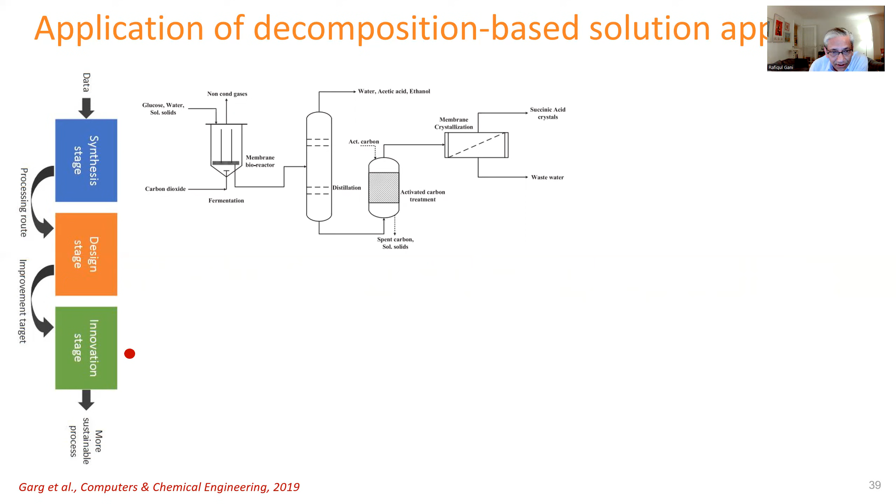We design this process, then we find out the weak points of this process to further improve. We set the design targets, then we solve the innovation problem, and we find the final flow sheet, which is this, and there are other alternatives to it. And then we represent the alternatives in terms of the boundary and the alternatives that are inside. So these are true sustainable process design alternatives.

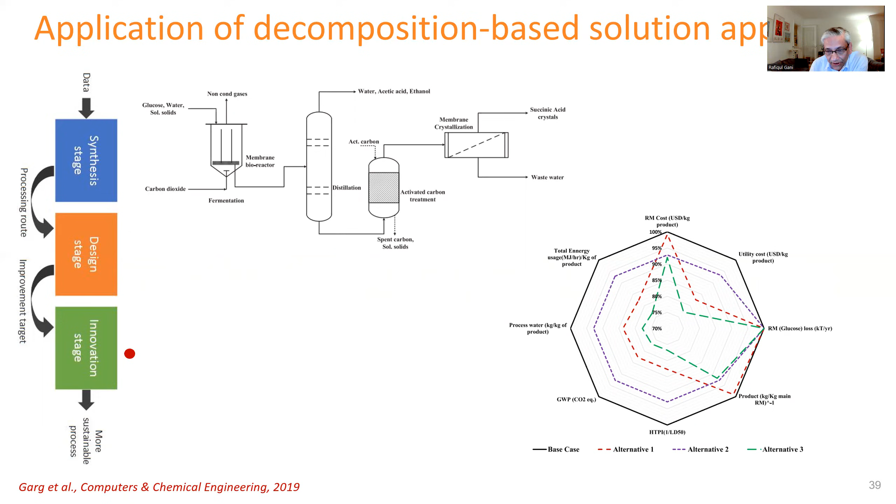Finally, I want to end with perspectives and conclusions. It's a busy slide. I will not go into the details of it. What I would just indicate is that reality, which is experiment-based, needs to be combined with virtual reality, which is model-based, to find and confirm the final result at reduced cost and in the shortest time. This can be achieved through an integrated approach. The virtual reality will find the solution very fast, and then reality would do the experiments to confirm the solution.

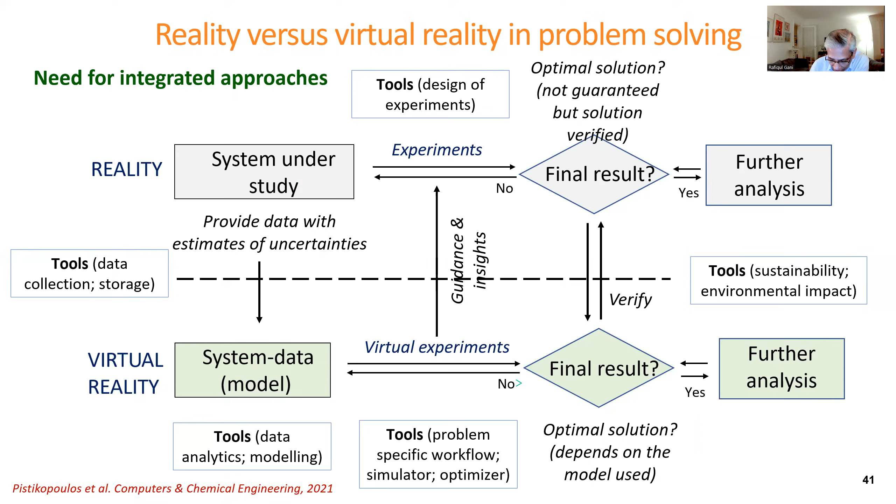Also, as perspectives, I want to highlight that we want to achieve circular economy objectives. Total circularity cannot be achieved because of thermodynamic limitations, but whatever can be achieved in terms of resources, services, and products, we will achieve. How will we achieve them? By increasing the time horizon of availability of resources and products, or by replacing one resource or technology with another. So both can be done.

The means would be an integrated experiment and model-based approach, unification of methods and tools, integration of engineering and science, and also using augmented PSE techniques, that is machine learning, AI, and so on, together with the core topics. And more research is necessary in this area.

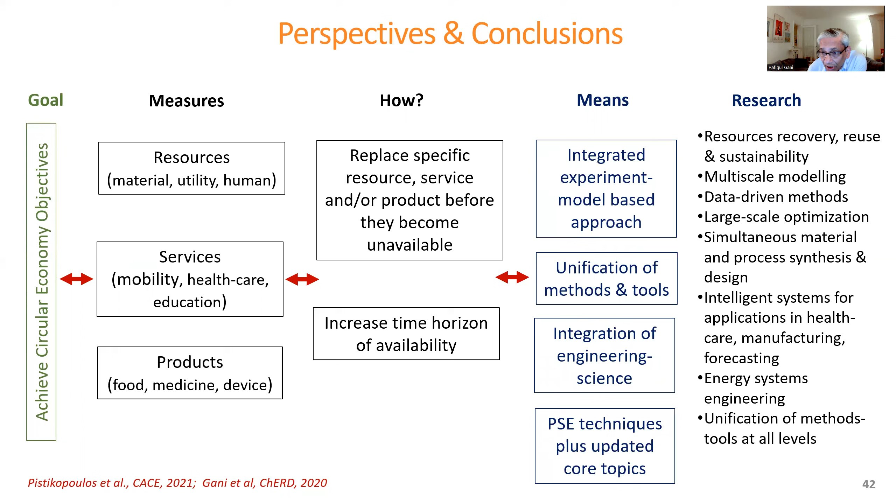Finally, I want to end with the role of chemical and biochemical engineers. One is to promote research and development. I will not read out everything. Another one is to facilitate global dissemination, promote conservation and care of global resources, health, safety, and the environment, promote the highest standards of professional ethics and conduct for chemical and biochemical engineers worldwide, and to safeguard the public. Finally, prepare for the next pandemic or disaster with methods and tools that can contribute to quick problem solving. That is, contribute to achieving sustainable development and influence the decision makers.